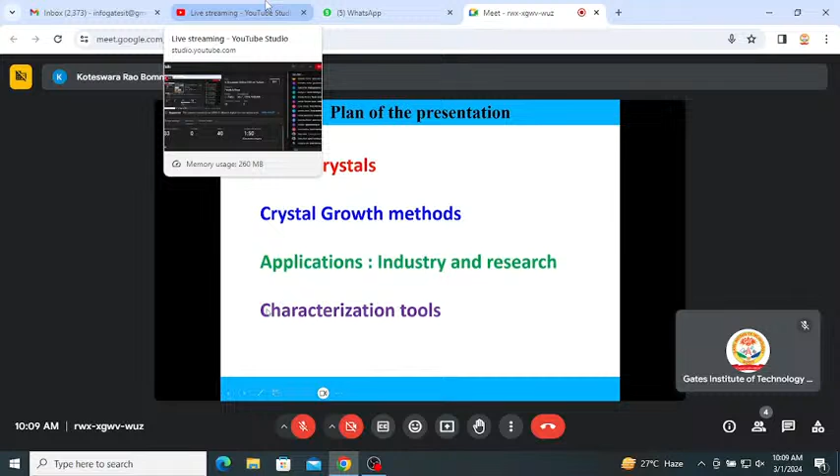Okay, so after explaining these three elements, in the next talk I will give their characterization tools, particularly how to characterize single crystals like X-ray diffraction or Laue diffraction, and then scanning tunneling microscope, one of the microscopy techniques. We will go through them, and after that physical properties like magnetic and heat capacity and so on. Okay, so in the first part, I would like to start with some elementary question.

What is crystal? A very simple and straightforward answer is that a crystal contains a set of atoms, and those atoms are arranged very periodically. So you will see very regular repetition of some set of atoms, that is called the unit cell. And these unit cells are ordered infinitely. So this is a simple definition. It should be periodic, and it should have long range order. If both periodicity and long range order exist, then you can say it is a crystal.

And there are different types of crystalline materials. One is single crystal, and then polycrystalline, nanocrystalline, and amorphous. Of course, amorphous is not a crystalline material, but just to give you an idea about its size and how it is different from crystalline material, I have shown it here.

Okay, single crystals. Typically their size is large. You can touch them, you can feel them, greater than a few millimeters, and their size can extend up to several meters also. Then polycrystalline samples are similar to crystalline material, but they have grain boundaries. You can see the schematic diagram of the single crystal and polycrystalline sample.

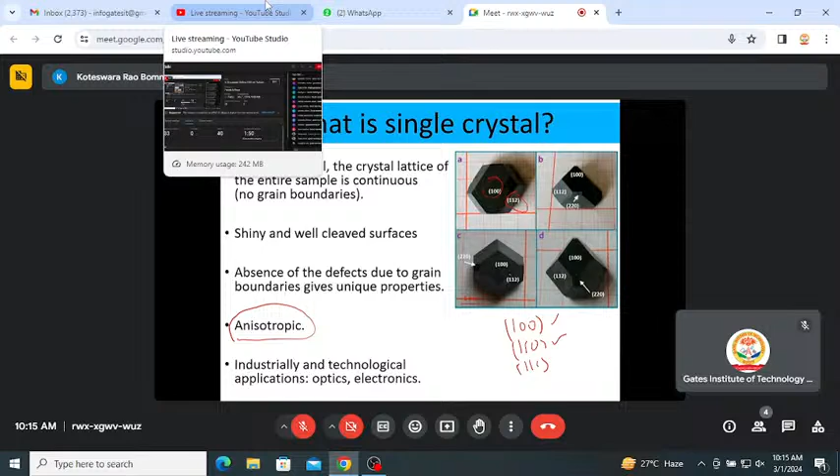Okay, so our real world is very much connected with these single crystals. So we will see how these single crystals are grown, and what the different kinds of methods are, and for each method there will be pros and cons. So we will discuss some of them.

Okay, first, single crystal growth can be done in various ways. One is melt growth. You can have a solid sample, just melt it, and using a variety of techniques, one can pull the crystals out. Second technique, you dissolve your desired material in a solution, and then follow a sequence of steps of slow heating, slow cooling, and so on. You can get the crystals from the solution also.

And the evaporation technique, something like chemical vapor transport, where you don't have to melt the sample or dissolve it. There will be a transport agent, like chlorine or iodine, that carries some part of the sample bit by bit and deposits it at the other end, where it forms crystals. So broadly there are three ways crystals can be grown, and let us discuss them one after another. The first one is melt growth.

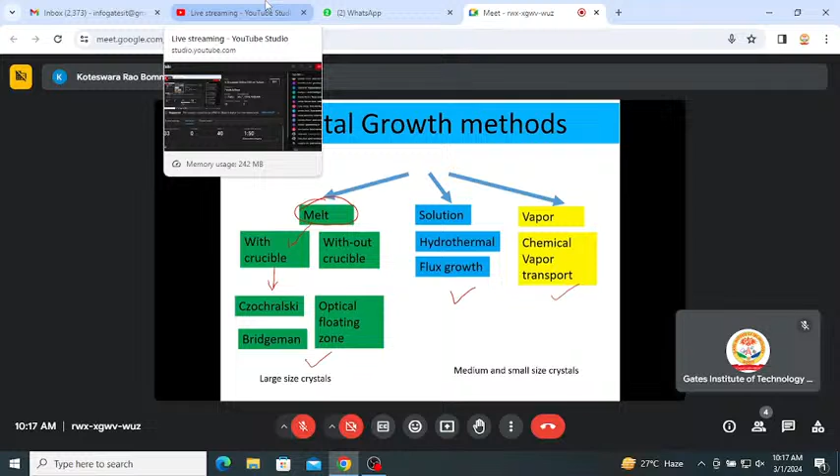Melt growth means you must have a container, a small crucible, where you can melt the material. That is one method, and without a crucible one can also melt. Okay, so the first method is with a crucible. One of the methods we will see is the Czochralski method.

So in this method, what people do is melt the material, for example, silicon. Silicon melts congruently. Congruently means that some elements after melting won't lose their crystal structure. Those are the category of congruently melting crystals.

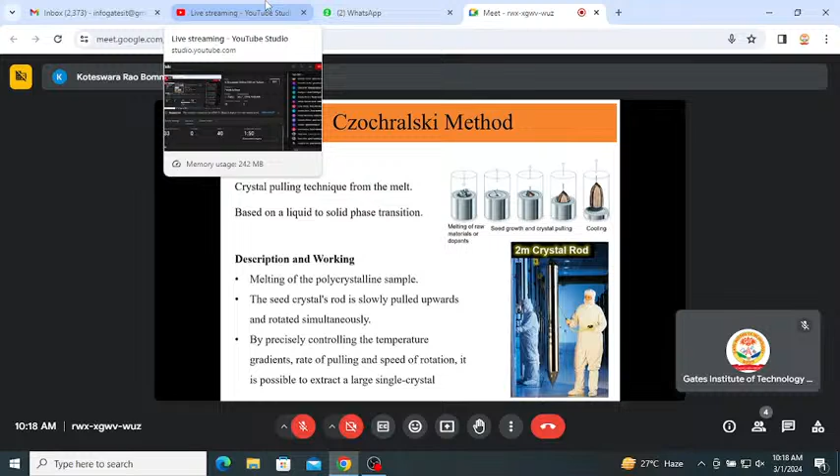For example, silicon single crystals one can prepare in our laboratory also. Just take elemental silicon, melt it and slowly cool it down, and you will get single crystals, but very small crystals, and not of very high purity. But industrially they have a process to grow almost perfect, ideal single crystals of large size.

Okay, so for growing single crystals of silicon, one of the famous techniques is the Czochralski method. In this technique, one needs to melt the material this way. The elemental silicon is getting melted in this form.

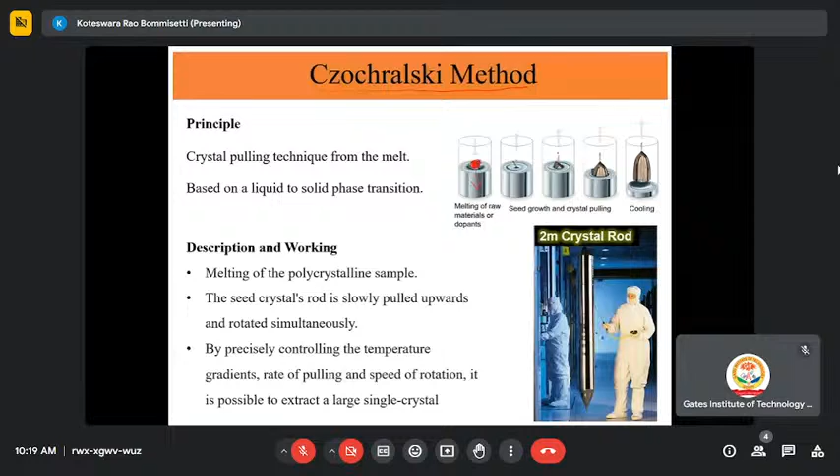So once it is melted, it is in the liquid form. When it is in the liquid form, choose some seed crystal, just dip it inside this melt, and then slowly pull out. When you slowly pull out, you can see the crystals are coming along with the melt. From the liquid form, you can see the liquid level is getting decreased eventually, and a single crystal is coming out. So this is one very efficient way of growing large size crystals.

You can see the size of the crystal. It is almost like 2 meters of crystal. This is used industrially in most of the fab labs, like the Taiwan semiconductor manufacturing unit, or many places like Intel. All these big companies mostly have this crystal growth technique.

Okay, so in this method, you make the metal into liquid, and you are cooling the liquid slowly and pulling the liquid slowly and making the crystals. This is how you can make the crystal. So how slow do you have to do it? It's very slow, like 1 millimeter per hour. That means in a day you can pull only 2 centimeters of crystal. So if you wanted to grow this 2 meter crystal, you have to wait for several days, nearly 100 days, and only then will you get such a crystal.

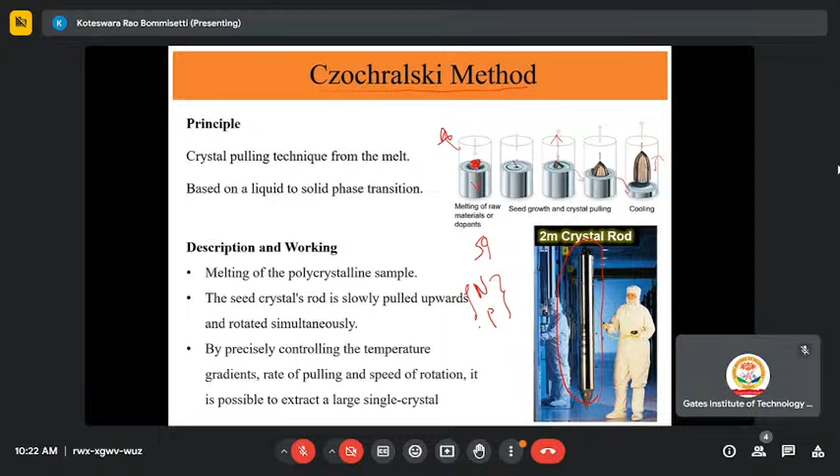Another way is if you wanted to dope any element, for example, instead of silicon, you want to prepare n-type or p-type silicon with some arsenic or phosphorus. This is the best way. You can melt along with silicon some phosphorus, arsenic, whatever desired, melt them and pull out the crystals. That way you can prepare a variety of crystals, and you can control various preparation parameters so that the size of the crystal, orientation of the crystal, everything will be in your control. This is one type of technique that most industries are using.

Here one grows the crystal with very slow pulling. Suppose you don't have a seed crystal, then it is very difficult to grow using the Czochralski method. So what if you don't have any seed crystal? There is another technique, the Bridgman method. In the Bridgman method, the furnace is designed in two ways.

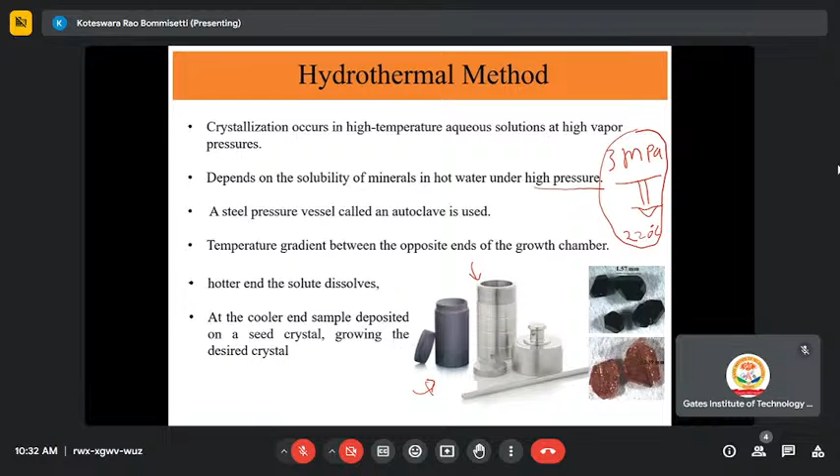So high pressure means it's like a water pressure. Maybe 3 MPa pressure will be at something like 220 degrees. So under small, minimal conditions, one is able to grow crystals using this hydrothermal technique. Of course, there are a few more techniques, like hydrothermal but high pressure techniques. But containers maintaining the water vapor pressure at temperatures more than 250 are not available. One needs to use external pressure in a normal steel body. So one can generate the high pressure and do this kind of crystal growth under different temperature conditions. So this is another method.

So how to avoid this container? There is a technique without using a container to grow crystals. That I'm going to discuss now. Without using a container, one can grow very large size crystals. That is the optical floating zone. For the optical floating zone method, you need to make your desired sample, a polycrystal sample. This material is called the feed rod. And a similar type of rod you can make as the seed rod. So the seed rod and feed rod are lying one above another.

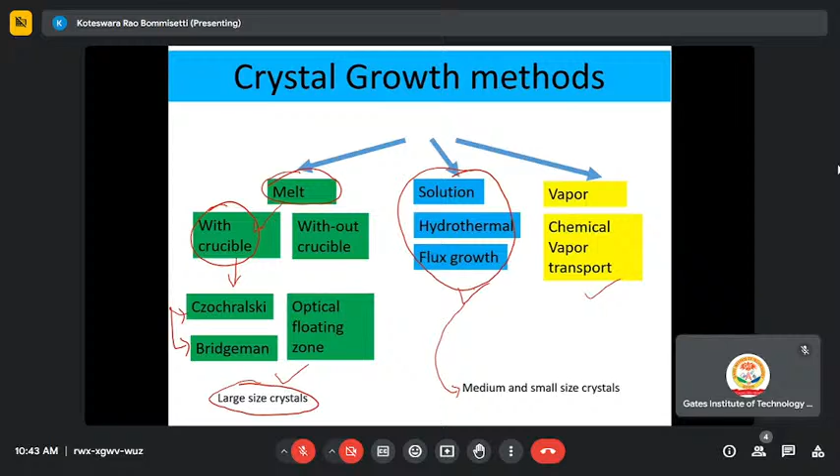Another reason we should look for crystals only, as I said earlier, is that most of the physical properties depend on the size of the single crystal. If you have a very infinite size, then there is no grain boundary effect, so the properties are quite different. If you have crystals with bad quality, like polycrystalline samples, it won't be applicable anymore.

That is why microfabrication labs put huge effort into growing high quality and large size crystals, especially silicon. And silicon is not only useful for current electronics.

It is heavily used for several other things like photovoltaics, solar cells, and many optical properties too. So not only silicon, there are many other semiconductors, but those are not elemental semiconductors. Elemental semiconductor means silicon and germanium only, these two only.

But one can synthesize semiconductors in the laboratory by mixing two elements, creating compounds. These are compound semiconductors. For example, gallium, a third group element, and arsenic, a fifth group element, combined in a 1:1 ratio gives gallium arsenide. This is a compound semiconductor. Similarly, second group with fourth group, sixth group, or second group with sixth group also makes these kinds of combination semiconductors.

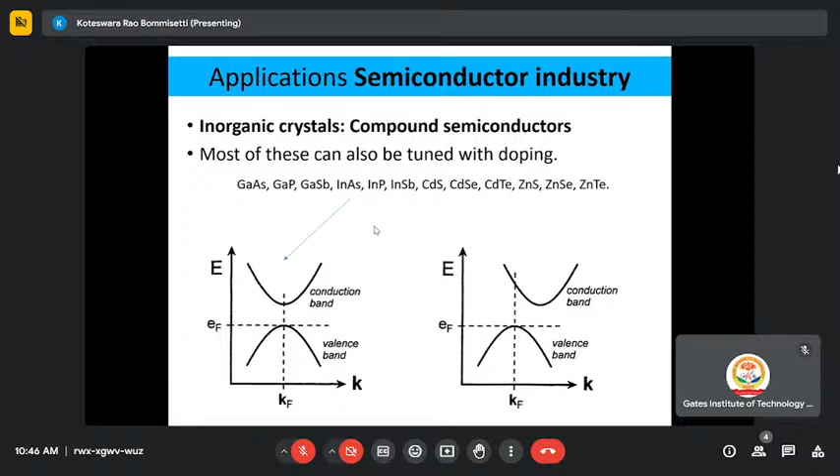So these crystals can also be grown using the Bridgman technique, which I have shown previously.

Another important material of current interest is graphene. Most of you know this graphene has large carrier mobility and high thermal conductivity. It is a very interesting material, but its application is still under research.

Single crystal graphene, if you are able to grow it single crystalline and very large, can be used for applications much better, as it exhibits much better properties than silicon in terms of conductivity. So it is used in many other devices, but it is still under research for growing large size crystals.

One of the challenges is to grow large graphene using these techniques. This is a kind of interesting research module in this type of crystal.

Another type of crystal is organic semiconductor crystals. These are useful for flexible electronics, so you can hold and fold them, like how you fold something, same way you can hold your mobile and keep it in your pocket, a convenient place, and carry it anywhere. These semiconductor crystals are highly useful because they have flexibility of holding, but they have their own challenges.

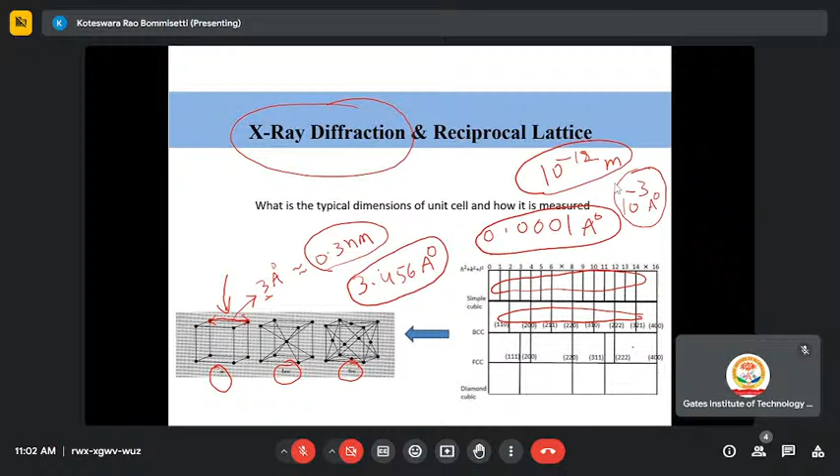Whereas for BCC, there is a limitation - all peaks will not appear like that of simple cubic, so only fewer peaks show up. For FCC, even fewer. For diamond lattice, even fewer still. So there is a huge difference, even though they are all cubic lattices. Despite having all cubic lattices, simple cubic is different from BCC, which is different from FCC and diamond lattice.

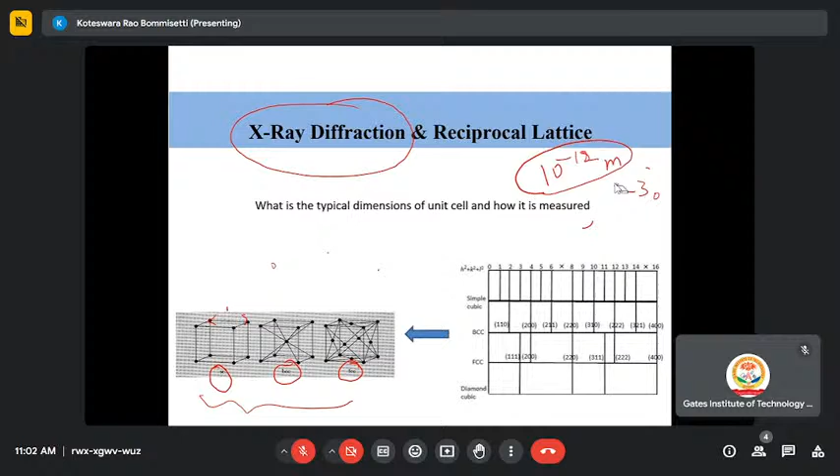That means whatever crystal structure you have, it has a very good connection with X-ray diffraction. X-ray diffraction is a unique blueprint of the crystal structure. If you know the crystal structure, you can calculate the X-ray diffraction, or if you have the X-ray diffraction, you can determine the crystal structure - vice versa can be done. Both are mutually connected through the Fourier transformation.

So how are these two connected with each other? The real crystal structure has direct space, whereas your reciprocal lattice is nothing but the Fourier transform, having indirect space - like an inverse space, reciprocal space. This inverse space is nothing but the X-ray diffraction. So both are almost equivalent - X-ray diffraction and reciprocal lattice have the same meaning. How these two are connected, we are going to discuss in the next few slides.

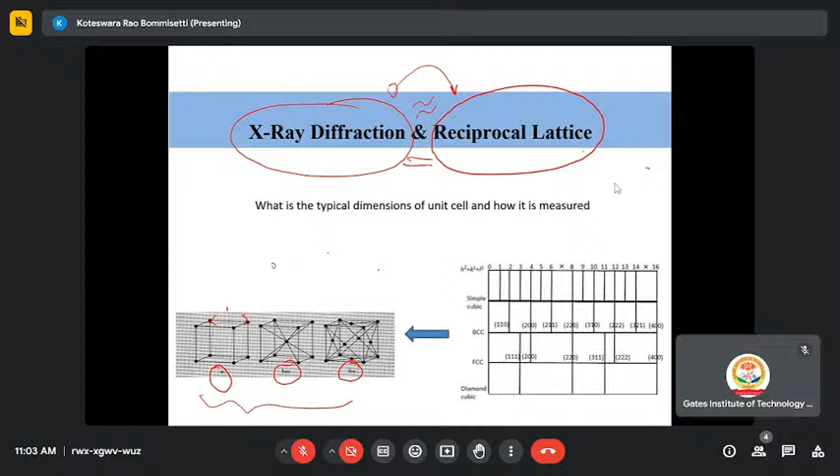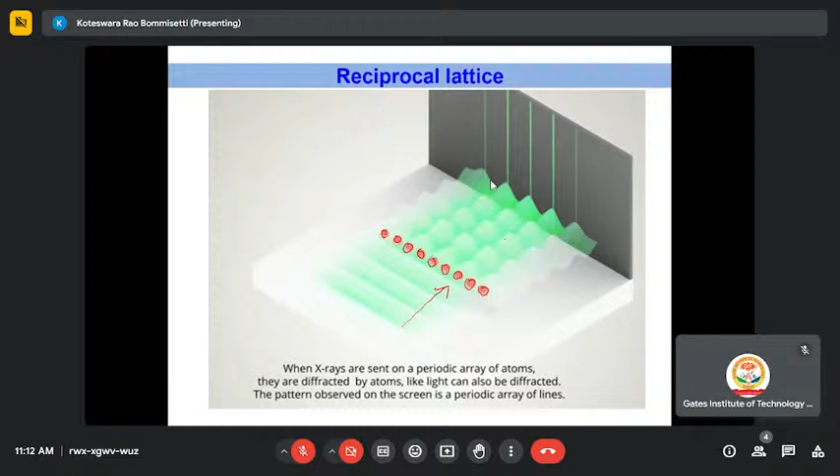1 angstrom unit means 10 power minus 10 meters, so it is difficult to see these kinds of dimensions in a microscopic way. But what if you do the experiment in a reciprocal way? If you do the experiment in a 1 over angstrom kind of way, then you will get 10 power 10, something like that. This can be easily estimated.

So by measuring this easily, you are able to calculate the corresponding direct space. So this is X-ray diffraction; using it one can get this microscopic picture. This is how crystal structure, reciprocal lattice, Fourier space and all these are interconnected with each other.

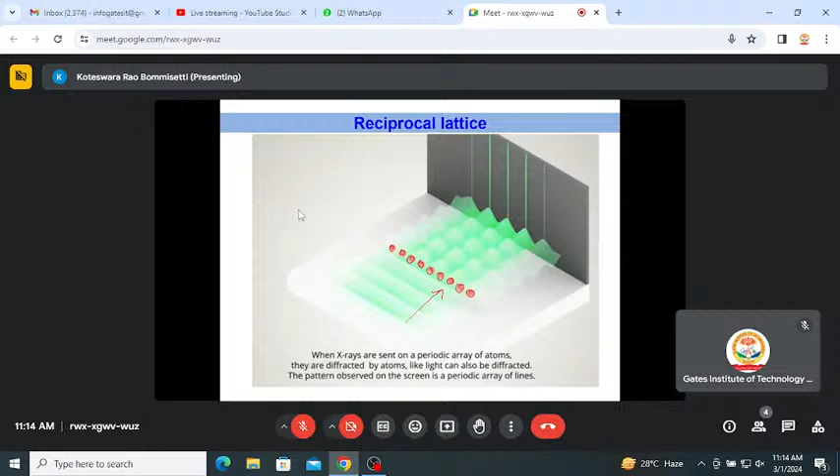But this is kind of an indirect technique. It would be good if you could see the atoms directly, measure them directly. That will give you a better feeling than measuring and analyzing the X-ray diffraction and saying this is the distance between two atoms and this is the type of unit cell and so on. If you can see those crystal structures directly, that will give you a wonderful feeling.

So can we really see these atoms? That is the question. It is possible, but not in a very high resolution way. One can probe the atoms using scanning probe microscopy. This is a microscopic technique that images surfaces. It won't image the full crystal structure, but at least it images the surfaces. It works based on the piezoelectric effect, and how it works we will discuss here.

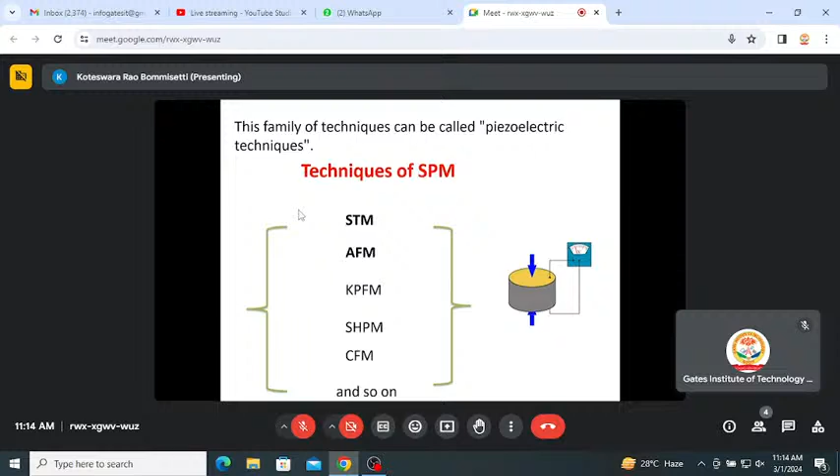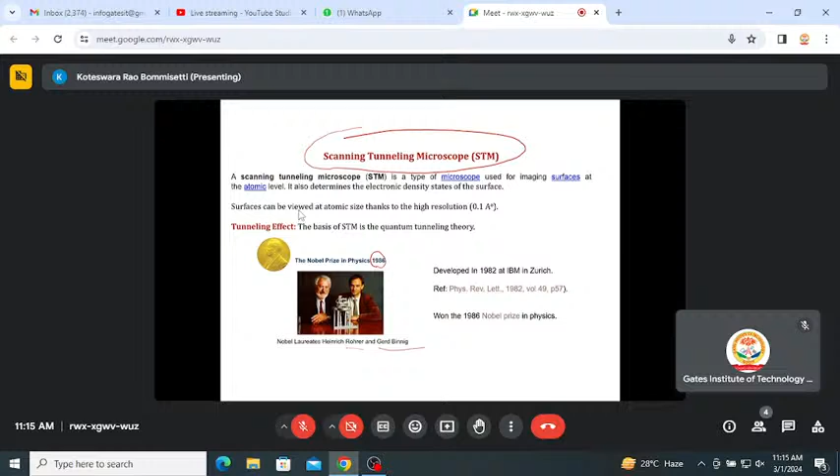So this is a scanning tunneling microscope. It works purely based on a quantum mechanical principle, quantum tunneling. For discovering the scanning tunneling microscope, a Nobel Prize was awarded in 1986 to Professor Rohrer and Binnig. These two from IBM Zurich got the Nobel Prize in 1986. So now let us look into the principle.

Okay, this scanning tunneling microscope. So here in this scanning tunneling microscope, it's almost like how a blind man walks on the road. If you can sense, the same way it works. This blind man doesn't have any way of seeing the real world. Then he holds a stick. He senses with the stick and sees whether there are any obstacles in his path. This is how he finds out by himself and walks around things.

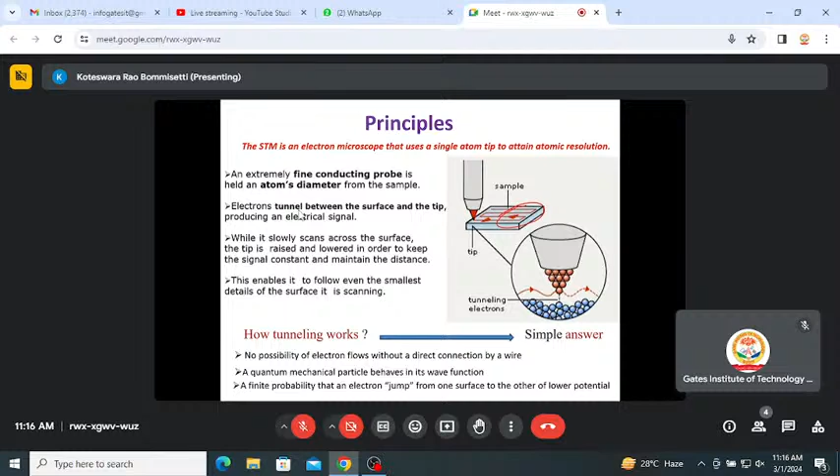So similarly, there is a sample. Okay, this is the sample surface. And this is the tip end of a probe. So this tip helps to see the surfaces of the crystals and so on. Okay, so now, how it works is as follows. Take a sample with a very smooth surface, and then

the tip is attached to piezoelectric sensors. Then you apply the electric field between the sample and tip. To the sample you give the negative voltage, and to the tip you give the positive voltage. Then the sample has, let us say, electrons, and the tip is biased with the positive voltage. There may be a chance of tunneling between the sample and the tip. So a tunneling current happens, although they do not touch each other.

You can see here, this is the sample and this is the tip. In this microscopic picture they are not touching each other, but the information of the surface is carried to this tip. There are different ways of probing with this technique, like keeping a constant height between the tip and the sample. That is one way, the constant height method, or set a constant voltage between them in such a way that it always maintains that constant voltage.

Accordingly, whenever this tip senses more potential, it will move. If between the tip and surface you have kept, let us say, 5 volts, it should always sense 5 volts. Suppose suddenly it sees an atom, then obviously it will sense more voltage. Then it will adjust its height accordingly, so it always maintains the same voltage difference or height between them. This is how the tip moves across the sample from here to here.

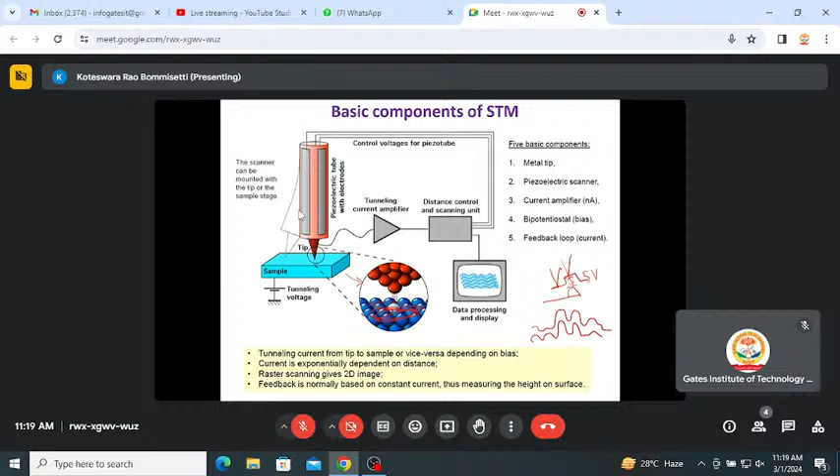So if the surface is like this, how will the tip move? The tip also moves in the same way, because it has to maintain its constant height and voltage. This is how the surface of the sample can be probed using this technique. So this is how, using the quantum tunneling technique, images can be captured.

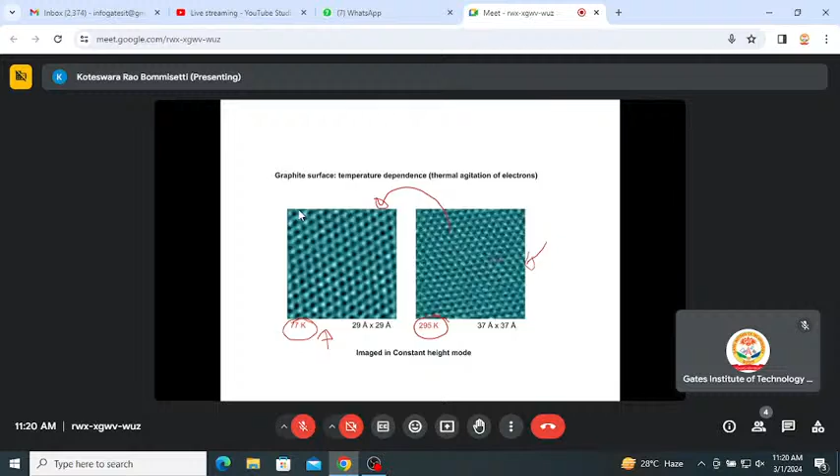So this is how one can see the direct lattice and probe some 2D structures or layered structures. So this is the end of the scanning tunneling microscope and X-ray diffraction.

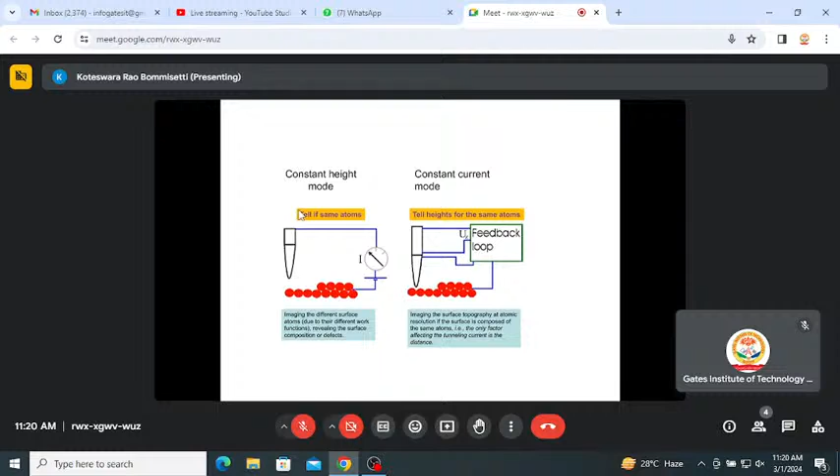Okay. So if you have any questions, please let me know. Any questions? Sir? Yes, yes. Please ask me. Hello sir, am I audible? Yes, you are audible. Please tell me. Something is cut in between. If you have any question, please feel free to ask via audio. Yes.

Sir, one question I would like to ask. Yes, yes, please. What type of crystal, single crystal or polycrystal, must be preferred for device fabrication? Okay. So device fabrication depends on the kind of application you want.

So, for example, almost all your mobiles and integrated chips are embedded on wafers of silicon. This silicon has been used very rigorously, almost in all the devices. For example, if you go to solar panels, there are different types. Some people have been using the silicon type, some people are using the cadmium sulfide type. So that depends on the application.

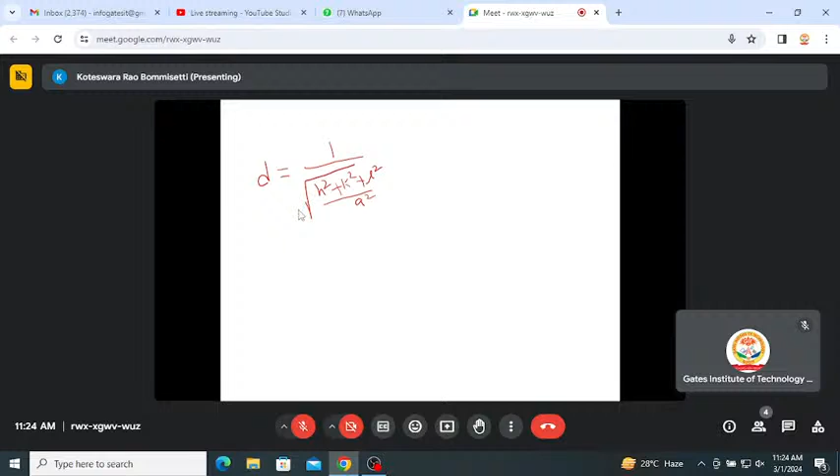Let us say the distance between two planes is d equal to 1 by root of h square plus k square plus l square by a square. This is the typical distance for cubic crystals. Another way to say it is a by root of h square plus k square plus l square. This d is determined from the 2d sin theta equals n lambda experiment. So this is Bragg's law.

Lambda we know, and n is equal to 1 for any kind of experiment. So from theta, one can estimate d. Once you know d, the ratios of these two can be estimated. This is how a and hkl can be estimated simultaneously for the cubic lattice. Suppose you take an orthorhombic lattice. For the orthorhombic lattice, this formula will not work anymore.

For the orthorhombic lattice, d is equal to 1 over root of h by a whole square, k by b whole square, l by c whole square. So like this, more parameters are there, more complications come into the picture. If you can write a program based on the starting elements, you will be able to calculate. If you go to triclinic or monoclinic, there are 6 parameters: a, b, c, and the angles. Definitely with pen and paper, you will end up with a lot of errors.

If you write a program with these kinds of equations, one can easily find a, b, c, alpha, beta, gamma. For example, the software FullProf. It is easily available; one can download and learn it. On YouTube there are many lectures on how to refine structures using it. So one can easily find the parameters of non-cubic or any complicated lattices. Okay. Any questions?

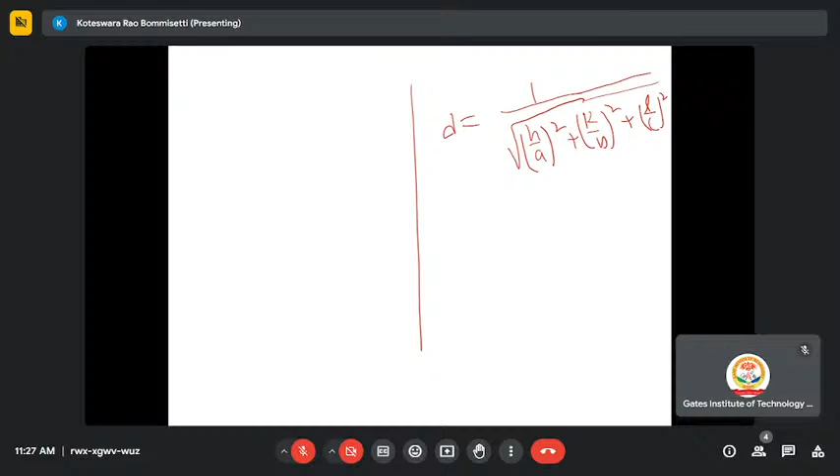So that is the thing. This is the formula. The distance between two planes in the orthorhombic crystal structure, for example, which is non-cubic, can be determined using this kind of formula: h by a whole square, plus k by b whole square, plus l by c whole square. So this is how non-cubic structures can also be determined using this formula. Okay, sir. Thank you, sir. Okay. Right.

Okay. So any further questions? No question, sir. Okay. Then I will go to the another part.

So far we have seen the crystals, how to grow the crystals, what are the applications, we have briefly gone through it, how to determine the crystal structure, that means how to understand the X-ray diffraction with respect to the direct lattice. So they are connected to each other inversely, and so on we have seen. Now we will see, if you have a crystal, how to do the properties, how they are distinguished from each other.

Then I will just quickly give another characterization tool apart from the X-ray diffraction and FESEM. So for example, magnetic measurements. So this is one of the physical properties. Once you know the crystal and crystal structure, then at the end you must know more details about its properties.

One of the properties I have chosen here, magnetic property, can be measured using a vibrating sample magnetometer. So this is another important characterization tool. Here I will show the working principle of this instrument called vibrating sample magnetometer. First, I would like to give the content, how I will give the presentation. So first I will give the working principle of VSM, vibrating sample magnetometer.

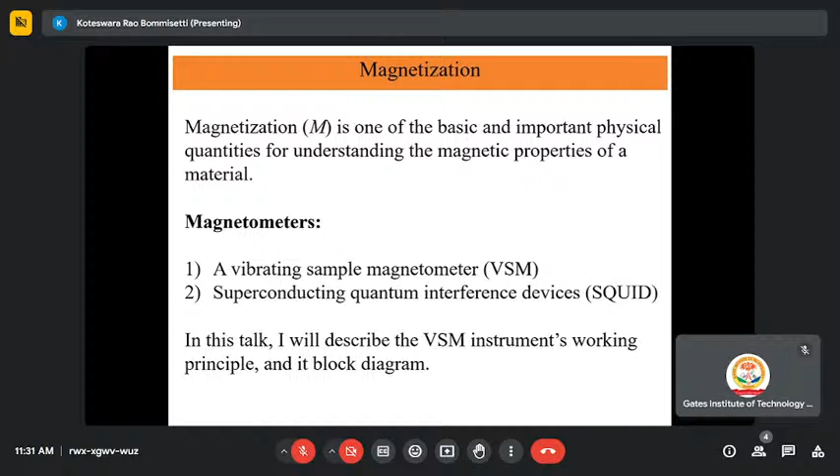So there should be an instrument, a very sensitive instrument. It should be able to measure this magnetization. Okay. So in this talk, I will briefly talk about the working principle of one instrument, that is called vibrating sample magnetometer. This vibrating sample magnetometer works based on Faraday's principle. Okay, let us recollect what is Faraday's principle.

Suppose you take a bar magnet and you move the bar magnet into a circuit where the circuit has a coil and that is connected with some small ammeter which senses whether current is passing through the circuit or not. So when you place the magnet close to the circuit, it won't show anything in the meter. But when you move the magnet, push it towards the coil and take it out, then you will see some kind of current.

But this current appears only when the magnet is moving here and there. When the magnet is placed inside, it won't have any effect. When it is placed outside also, it won't show any effect. But when it is moving here and there, only then it shows the current. That is some induced current present in the circuit. That is because of Faraday's principle.

So what Faraday's principle says, rate of change of magnetic flux induces the electric current, like induced EMF. So this induced EMF is due to the rate of change of magnetic flux. Epsilon is equal to delta phi by delta t. So the magnetic flux should change with respect to time. Then only induced EMF appears, a very temporary voltage. It won't last for a long time. This current won't last for more than a few milliseconds.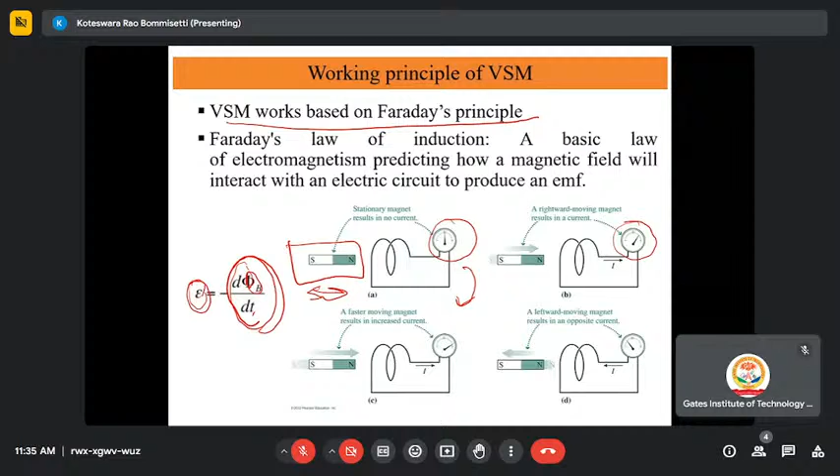So it's all related to the intrinsic property of the magnet one can find out. Using this simple Faraday's principle, this instrument is designed, and under the Faraday effect, this vibrating sample magnetometer works, and one can determine the magnetic properties of those materials.

This is typically how different types of vibrating sample magnetometers appear. Here is one electromagnet, which produces the magnetic field in this direction. A very small rod is placed inside the magnetic field, and when this rod is vibrated using this vibrator, moving up and down, there will be induced EMF inside the coils.

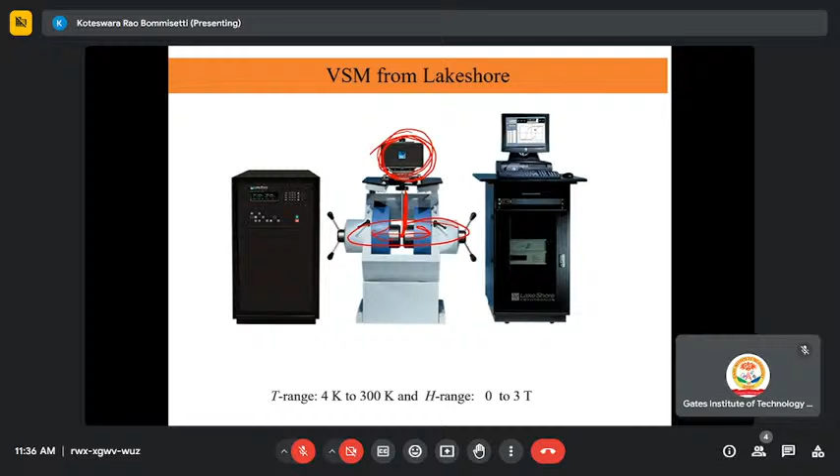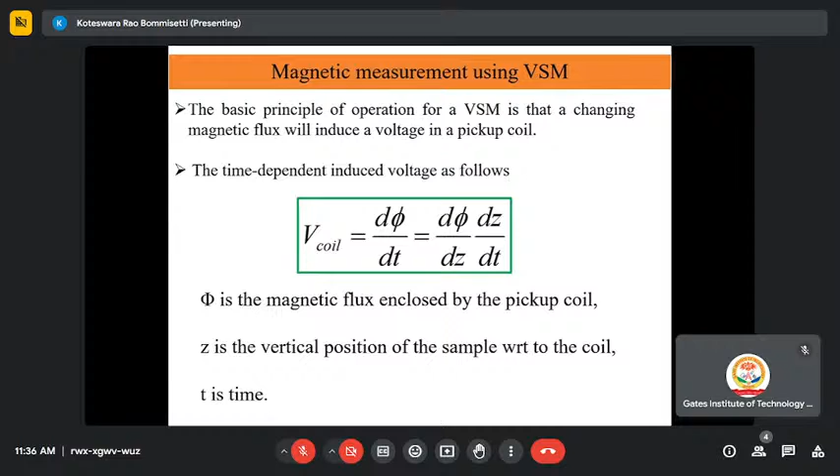Coils cannot be seen here, but that induced current will calculate the magnetization this way. Different varieties of instruments are designed based on this principle - one is Lakeshore magnet, another is PPMS, Quantum Design, and so on. So this is how this vibrating sample magnetometer works.

Then why are we learning about this instrument? Because it has a connection with your crystal and its characterization. For example, if you have a crystal, how these properties are found, you can see from here.

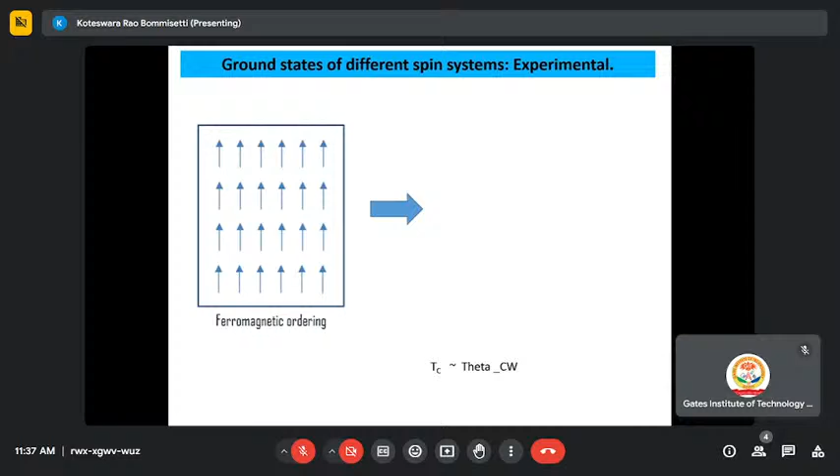For example, if you have a paramagnet, the susceptibility versus temperature looks like a simple paramagnet, showing 1/T behavior. If you have an antiferromagnet, there is a kind of magnetic transition. Below the temperature, it shows antiferromagnetic ordering. Above, it is paramagnetic; below the antiferromagnetic transition, it is antiferromagnetic.

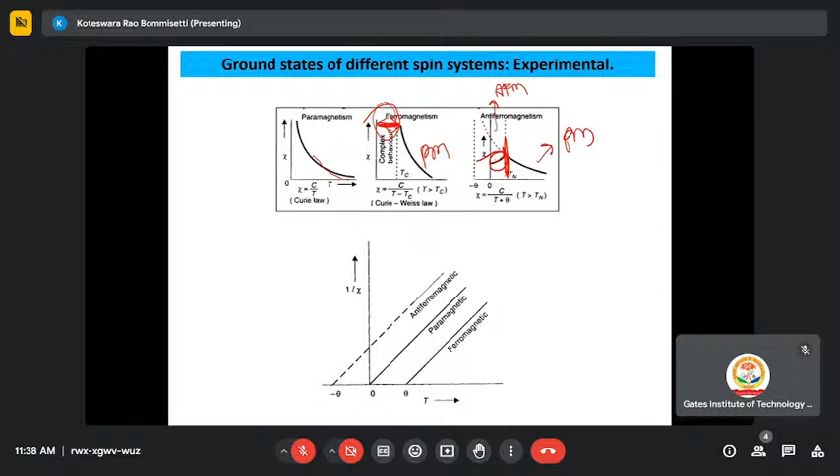The ferromagnetic mechanism also one can see. At high temperature, it is paramagnetic, like the antiferromagnet. But when you cool it, all the moments become ordered ferromagnetically, like a ferromagnetic ordered state - exactly like how if you cool a glass of water, it becomes ice. Same way, if you cool the paramagnet, it becomes like a solid. So this is how magnetic materials are characterized.

But if you want to learn more details about these magnetic properties, one must have crystals. If you have a crystal and orient it in the magnetic field direction - let's say this is the magnetic field direction and the crystal is oriented this way, then in different orientations - different orientations give you different varieties of plots.

For example, in the susceptibility versus temperature plot, you can see at high temperature in the paramagnetic region, for all H parallel to A, H parallel to B, H parallel to C, all three directions do not show any distinction, because it is a paramagnet, a disordered state. It won't have any distinction.

But when it enters the antiferromagnetic region, different directions show different values. Particularly H parallel to A shows a very wide increment, starting from 0 and increasing all the way to the maximum value. Whereas H parallel to B and H parallel to C are almost independent of temperature. So from this information - H parallel to A, H parallel to B, H parallel to C - you understand there is an easy axis.

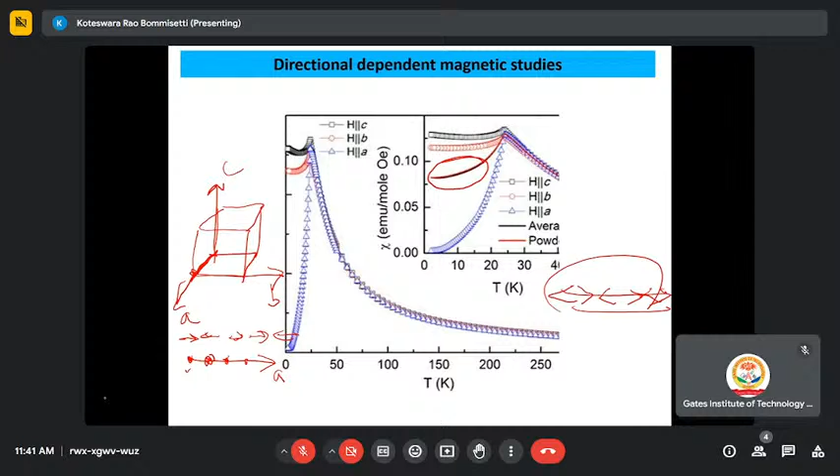So this is how one can understand the basic properties of materials using crystals, rather than boring polycrystalline samples. This is what I wanted to show: the advantage of single crystals and their growth, in both fundamental and application-oriented research, and in our day-to-day life.

So, with this I would like to close now. I still have some more time, so please feel free to ask questions if you have any. No questions, sir? Still none? Okay. Thank you very much. So if there are no questions, then can I say bye to you all?

Sir, now it's the vote of thanks, sir. Okay, thank you, thank you. Oh yeah, yeah.